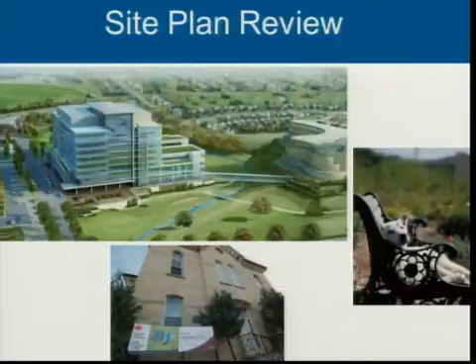I'd like to thank you for your support for the committee for over the past 4 years. I look forward to continuing to work with council on the accessibility-related issues. Thank you very much.

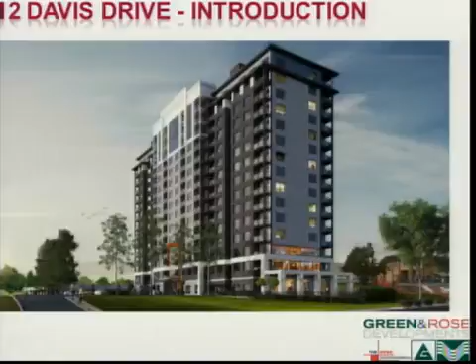This image is a sneak peek of what you'll be receiving this week in advance of our site plan review committee next week. We're very excited about the improvements to urban design we've made to the site plan since we first submitted, based on integrating staff's comments. We've come a long way since our initial design. Other than the two items I will talk about, we are in compliance with the zoning bylaw as drafted by staff.

As I said, the first item has to do with the accessory structure in the zoning bylaw, and the second is the parking ratio. Staff has recommended 1.1 stalls per unit. We have provided 0.96 stalls per unit, and I will be asking council to consider adjusting the bylaw today so we're in full compliance.

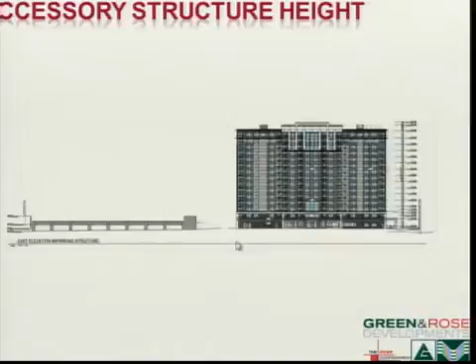On the second slide, just a quick review — this is our site plan, I won't go into any detail. This is the parking plan, which is at the south end of the site. This is the elevation from north to south, so you're looking at the east elevation here with Davis Drive at the right side of this picture, and the area I'm going to talk about is at the left side.

Zooming in, here's a wider view of the whole parking structure. You see the extent of the height at the top right here, which is the top of our stairwell. If you zoom into this area, you see that the distance between the average grade and the top of the stair roof is somewhere between 5.16 and 5.18, depending on which architect got it right — but it's somewhere in that zone, which is above the 4.6 maximum allowed by the zoning bylaw.

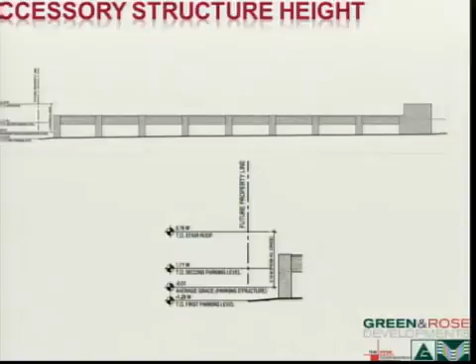The second issue we had deals with the parking ratio. We're requesting the parking ratio be reduced for two reasons. The empirical data shows the number of spots needed for this type of building, particularly due to the anticipated resident profile, is much lower than the 247 spots required by the town zoning bylaw.

In addition to seeing the neighboring properties with vacant spots, we also have Kim Nystrom here from Cole Engineering, who did our traffic and parking study, to answer any questions. I'm going to go quickly through this while we're up here for the deputation.

Also, the other reason is that, as we've mentioned before, this rental building, to make the numbers work, we had to decide not to do underground parking.

So one of the main reasons is the site plan as it stands right now with one level of deck parking. Our land area is very limited, so we have squeezed in as much parking as we feel we can get. We even lost a couple spots, or 4 spots, during our implementation of the town's engineering comments.

So we provided 0.96 stalls per unit, and we've assumed the need for a 0.1 visitor ratio, which is the zoning bylaw. That would allow 0.86 for the residents.

Initially, our parking study evaluated 2 comparable rental buildings near Huron Heights and Davis, which are inferior locations and don't have the benefit of Viva, which will be complete by the time we're done our building construction.

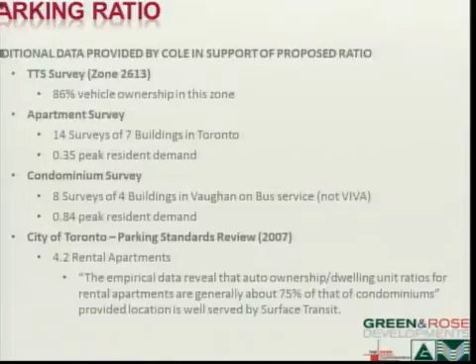We also dug up, in part of the York Region information provided, a quote from a report done for the City of Toronto that was used by the City of Vaughan in assessing their parking requirements as they update their parking bylaw. The quote was: the empirical data reveals that auto ownership dwelling unit ratios for rental apartments are generally about 75% of that of condominiums, provided locations are well served by surface transit. This building does qualify, once the Viva is completed, as being well served by surface transit.

Finally, the last piece - well, a couple more slides. I don't know where I am in the 5 minutes. How am I doing? Getting there?

Okay, so we took a different approach, because after we received the Housing York data, it became clear that different municipalities, including Richmond Hill, look at parking ratios differently. The site we were particularly looking at was the Richmond Hill Housing Community Hub on Yonge Street, which, instead of a blanket ratio of 1 per unit or 1.25 per unit, specified the parking ratio based on unit size and/or number of bedrooms.

So we dug back into the Toronto data and found a study done by Consult in support of the Toronto parking study in 2006 or 2007. I took their numbers and applied them to the 212 Davis Drive unit mix. This is the average for Consult, with an extrapolated 1-plus-den since they didn't include 1-plus-dens. Instead of 1 per unit across the board, they use 0.75 for a 1-bedroom, 0.81 for a 1-plus-den, and 0.88 for a 2-bedroom. Multiplied by our unit breakdown, that adds up to 183.

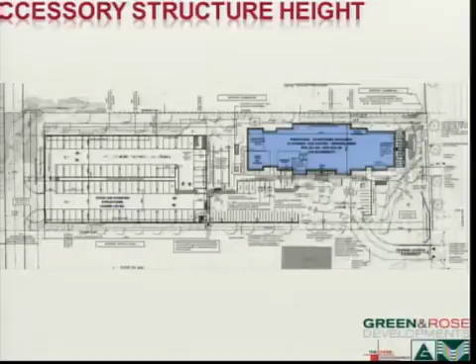Okay, great. On the second item, the parking item, a couple of questions for clarification. One is, are you saying that 16 is the number of resident parking spots that you're in deficit of? No. Because the number I saw on that slide was 225, and then I believe you said that when you actually did your calculations, you're at 206, and then you mentioned a number of 217.

I don't have the full site plan in front of me. I believe that if you multiply... you had a slide, second to last. Let me just go back. That one? Which slide are you talking about? I think it was that one. Then you touched on the fact that number 183 actually became 206.

Oh yes, okay. So per the zoning bylaw, if you multiply 1.1 times 225, the number is 247. That's the total, and we are actually providing 217, so we're deficient 30 spots. That's what I was looking for. Maybe 31, I can't remember how the rounding works. All right, so let's say 30 spots.

Those are resident only, or are they a combination of resident and visitors? That's total, total. That's total. Okay, that's included.

So basically if everybody in the building was to require a parking spot or enter an agreement to lease a parking spot, then you would have a deficit of 30. And those would be for your visitor parking.

Yeah, I mean, I think the requirement is one to one for the actual residents, so that'd be 225, and the balance up to 247 is for the visitors. Okay, I'm not as concerned about the resident aspect, because at the end of the day, the residents, as you said, there's a business case behind it. They will make that decision whether to enter into a lease agreement or not, whether they need that parking or not. My biggest concern becomes with the visitors.

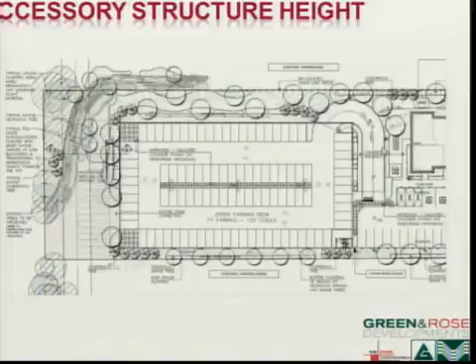And the reason it went down from 0.98 to 0.96 is a very simple reason: we used to have parking right here. If you look on your screens, there were 4 spots, 1, 2, 3, 4, accessed from this ramp, and engineering staff asked us to lessen the grade of this ramp so it was more gradual. Instead of 11%, now it's 8%, and because of the grade, we lost these 4 spots. So it went down from 221 to 217. Okay, now, thank you.

Okay, I think the rest of my comments I'll save for the report. This is just a question for yourself. I'll leave it for now.

Can someone clarify what we are talking about at 0.96? Are we talking about 217 cars, and at 1.1 are we talking about 247, with a delta of 30? It'd be nice to know that is correct. Okay, thank you.

Thank you, Councillor Twinney, questions of clarification? Yeah, thank you. Can you go back to the slide that had the other municipalities and showed all the different examples of the different park demand, peak demand numbers? Those numbers, when you say peak demand, are those what those particular buildings were? Do we have a variance in the bylaw for those, or are those exactly what is actually parking there?

Through you, Mr. Mayor, to Councillor Twinney, those were the actual numbers of the demand when it was measured. Okay, so that's how much of the parking is actually being used during the surveyed periods.

All right, and through you, Mr. Mayor, maybe to staff, have we overridden our bylaw exemption prior for buildings to reduce the number of parking spots? Do we have any cases of those? Have we done this in the past?

Mr. Nethery? Through you, Mr. Mayor, yes, we have. It's typically done with the benefit of a parking justification report that we've seen and that has been accepted by engineering.

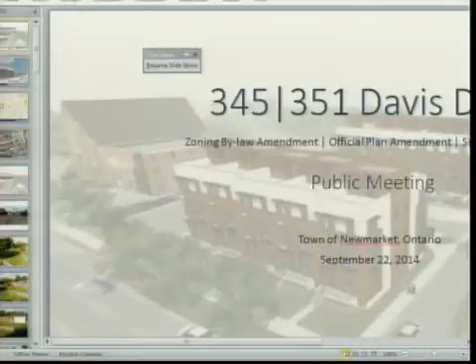My name is Andrew Ferancik. I'm a senior associate with Walker, Nott, Dragicevic, better known as WND Associates. With me I have Laura Calvin from our office, she's a planner and she'll be assisting me with the presentation. In the audience with me we have Reza Eslami from Icon Architects, and we have Henry Verbruggen from EMC Group, and they'll be here to address any questions that may arise specific to their areas of expertise.

The purpose of my presentation today will be to provide an overview of the development for 345 to 351 Davis Drive, after which we'll be available to answer any questions. I'd like to start by orienting us as to where the site is. It's located on the north side of Davis Drive, about 40 meters west of Vincent Street, about 1.2 kilometers east of Yonge, about 300 meters west of Main Street, and about 450 meters from the GO station. The site is about 3,200 square meters, about 34,800 square feet.

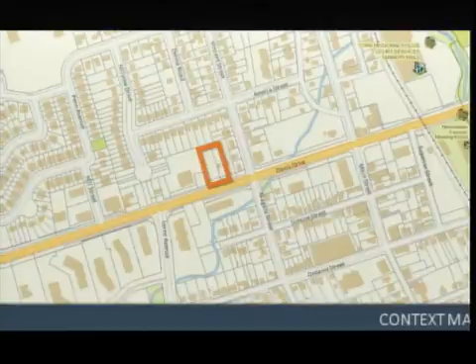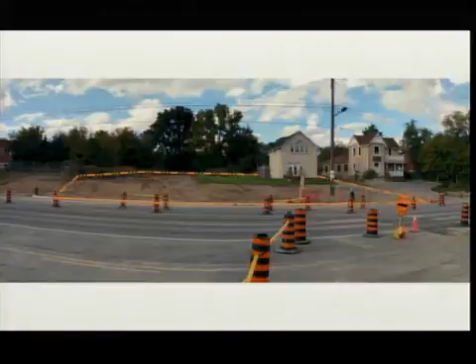I'm going to cycle through some of the site photographs, since everyone's probably very familiar with the site and the area. These were taken last week, so they're quite new. The orange boundary indicates the approximate boundary of the site. To the east we have the existing house that's been turned into a Tai Chi studio, and to the west a piece of the church. This is taken looking east on the site, right at the boundary with the church, giving a feel for what the site looks like from that position.

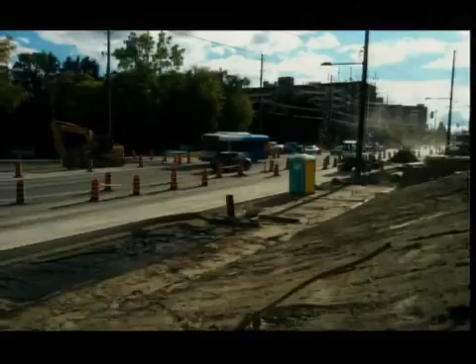This is looking south from the site at the current works ongoing on Davis Drive. It shows the mall across the street, and if we pause here we can see the surrounding character, including the taller apartment buildings to the west. This is a view looking east down Davis Drive as the work is currently underway, and this is looking west back towards Yonge Street and the church, which is immediately to the west of the site.

This is the house currently on the property, known as 345. And this is the Tai Chi studio to the east.

This is just another photo I decided to include that continues to show the context as Davis Drive is evolving into a corridor with transit and pedestrian connections. You see the lady having a hard time walking on the street right now, but that's going to change in the future.

So to give an overview and policy context for the subject site, there are 3 layers of policy that apply. The first layer is provincial in nature, dealing with the Provincial Policy Statement, the Growth Plan for the Greater Golden Horseshoe, and also the Big Move, put forward by Metrolinx.

Then we have the York Region official plan, and of course we have the Newmarket municipal context as well with the official plan and an emerging secondary plan.

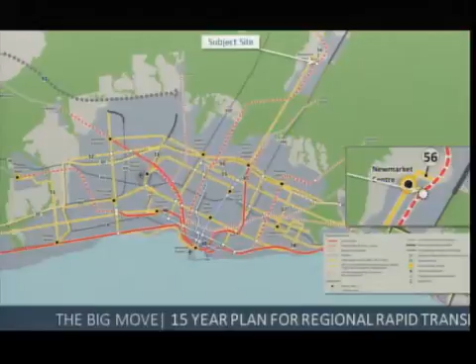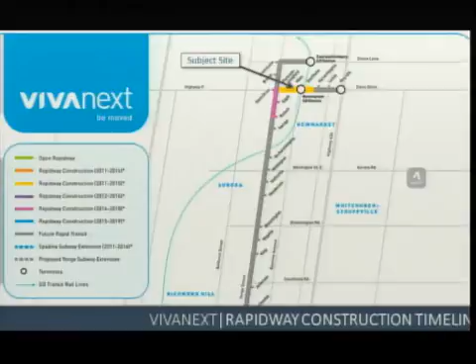Moving into the Newmarket context, the site is designated an urban center, which allows for a wide range of uses: commercial, residential, institutional. Also, once again, it calls for good urban design, street enclosure, creating a sense when you're walking on the street that there's a street edge to it, downplaying parking in front of buildings, so that you see a street edge instead of just parking lots, as you do in older parts of the city.

This shows within the Newmarket proposed secondary plan, which has been approved by council but is now with the region for approval, how the site relates to that. This is located along Davis Drive in what's called the Huron Way neighborhood.

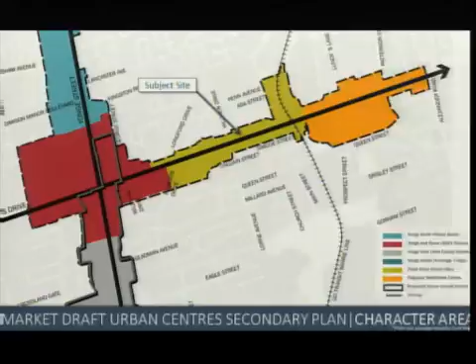It's located in a mixed-use area. Now we get into the very specific nitty-gritty of the designation. It's in the light blue area, which for the audience is very hard to read. But to sum it up, the designation proposed through the secondary plan would allow a minimum of 2 stories and a maximum of up to 8 stories with bonusing, or 6 stories without bonusing. Densities are called for in a range from 1.5 up to 2.5, with 2.5 associated with additional bonusing, where you could get an 8-story building with 2.5 FSI.

This shows the site is split-zoned currently. The site is zoned urban center, UCR. The west side of the site is currently zoned only for commercial uses as a result of a recent rezoning of the site.

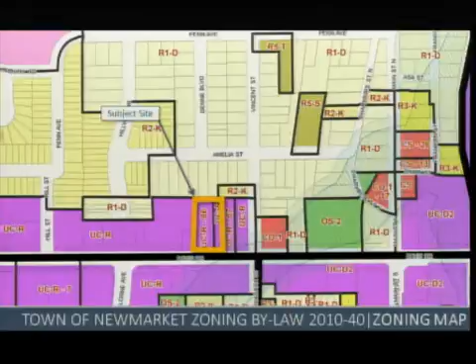On the left is what the current zoning permits for 345 Davis Drive, the portion of the site to the east. There's a range of residential and commercial uses permitted, including apartment buildings up to approximately 6 stories of height, 18 meters, and a maximum density of 1 FSI. For 351 Davis Drive, the west portion of the property previously rezoned for commercial, there is no residential currently permitted.

It's offices, pharmacies, medical labs or clinics, personal service shops, coffee shops, those types of uses, in approximately 10.5 meters, or 3 to 4 stories of height, 10.5 meters being the max.

So what's being proposed? The proposal is a 3-story stacked back-to-back townhouse development. It's comprised of 2 blocks connected on top of an underground parking garage with 40 units comprised of 4 one-bedroom plus den units, 32 two-bedroom units, and 4 three-bedroom units. So predominantly 2-bedroom units, larger units of approximately 1,000 square feet. Total gross floor area is about 42,800 square feet, which translates into a floor space index of 1.35.

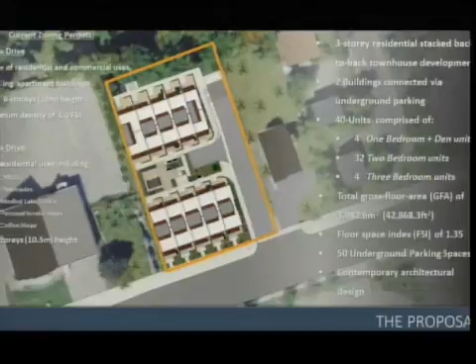There are 50 underground parking spaces proposed, 40 of which would be residential spaces, 10 of which would be residential visitor spaces, and that ratio would comply with Newmarket requirements. There's a contemporary architectural design proposed, and I just have some renderings I'd like to show, if you want to cycle through those.

This is a more technical site plan before I move on to the renderings, which shows thought put into how access occurs with a turnaround for fire trucks and loading vehicles. Davis Drive is on the right-hand side, so south is on the right, north is on the left. There's a setback of the back block of 12.25 meters from the rear property line, which creates a separation distance with a landscape buffer as well, that would be planted with a number of maple trees. There's a central courtyard which units would front onto.

This is a back-to-back stacked townhouse development, meaning there are units along Davis Drive, units along the back of the first block facing into the courtyard, and in the second block there are units facing south into the courtyard and also facing north into the landscape buffer.

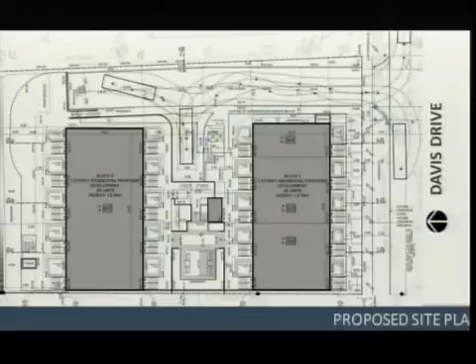This is seen a little better in these renderings. This is looking to the northeast along the future Davis Drive. We haven't rendered all of the beautiful improvements that will occur on Davis Drive once it's fully planted, but this gives a feel of what that might look like. Certainly there will be more vegetation.

This is just moving as if you're walking on the other side of the street, giving a feel of what it would look like, with some steps leading up to the access to the lower and upper suite. There is a lower suite, 2 levels, and an upper suite, 2 levels, and a portion of the lower suite would be in the subgrade area.

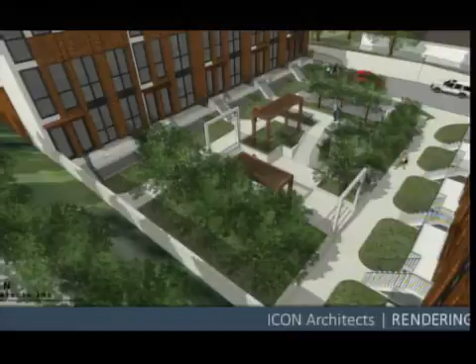This is a bit of a bird's eye view looking into the site facing west, into the courtyard area. This is a better view of that courtyard area as if you were standing on the north block facing west. And this is another view into the courtyard area, showing how it would be greened and used as an amenity space for passive enjoyment.

This is a view from the rear. This would be a view from the landscape buffer looking to the southwest. So that gives an idea of what the back of the development would look like, with units that don't have backyards but actually face into that area.

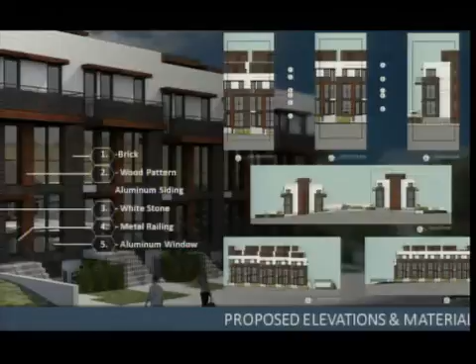This slide we've included to provide an indication of what the materials would be. These are proposed to be brick, wood-patterned aluminum siding, white stone, and metal railings and aluminum windows. So those are the general materials proposed.

And just in summary, in terms of the rationale for the appropriateness of the development, in our opinion it represents a modest intensification within the designated regional intensification corridor. It's in proximity to the growth center and the GO station, and it's along Davis Drive with the new BRT being proposed.

It's a sensitively designed intensification in the urban center designation, which is one of the land use designations intended to experience that type of growth in Newmarket. It meets the general intent of the Newmarket Urban Center secondary plan, and will support the development of a mixed-use community along Davis Drive, which is the ultimate goal of the policies of both the town and the region.

It will create a pedestrian-friendly street facade along Davis Drive. It will encourage walking and enhance safety because it will have passive views onto that street. It won't be a scary place to walk, it will be a much more inviting place to walk.

It also represents a lower ground-related scale type of development within a context that is planned to accommodate quite a bit more height, quite a bit more density over time. This is probably one of the first developments to really come in under the new framework that's being developed now, so it's setting the preliminary tone for creating that streetscape.